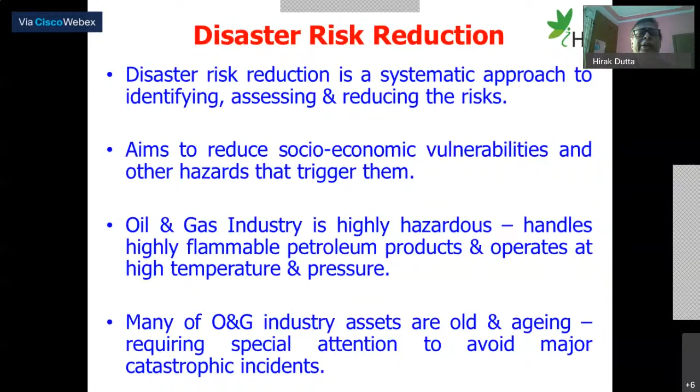But the most preferred options are engineering and technical controls. That's paramount in our industry or any industry - how strong our engineering and technical controls are. If we want to improve operational discipline, if we want to achieve operational excellence, we need engineering and technical controls. As Mr. Surya Prakash has said, and as the Honorable Prime Minister has also talked about, adopting state-of-the-art technology is paramount. Unless we have state-of-the-art technology, we will not be able to ensure smooth, reliable operations.

So then we can also isolate the risk, substitute the risk, or eliminate the risk. Therefore, inherent safe design is very important. Now, when we talk about this, there are three important parameters. The first important parameter is design. We need a very strong design of any installation, be it an oil and gas installation, a steel plant, or a fertilizer factory. Until design of the plant is very robust, we will not achieve excellence.

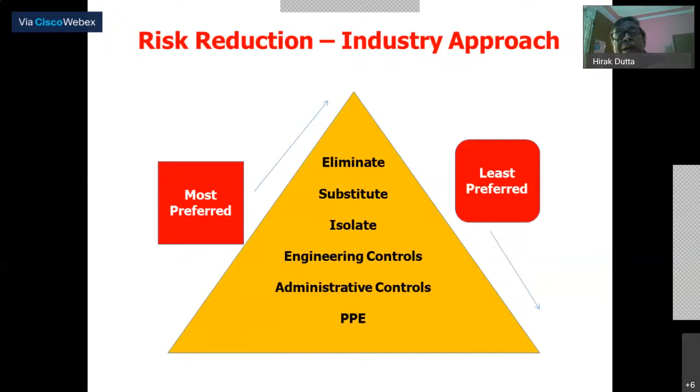So the important thing is how to reduce the risk. I say we must stick to the fundamentals. Keep it simple - it's not a complex thing, but we must stick to the fundamentals. And what are those fundamentals? Design, fabricate, and install all facilities and equipment in accordance with applicable industry codes and recognized best practices.

Now we are coming to when we are procuring various equipment, are we following the standards, that is ASME standards, American Society of Mechanical Engineers standards, or API standard, or Indian-based standards? So therefore, we need to design, fabricate, and install instruments and facilities as per the industry codes and recognized best practices.

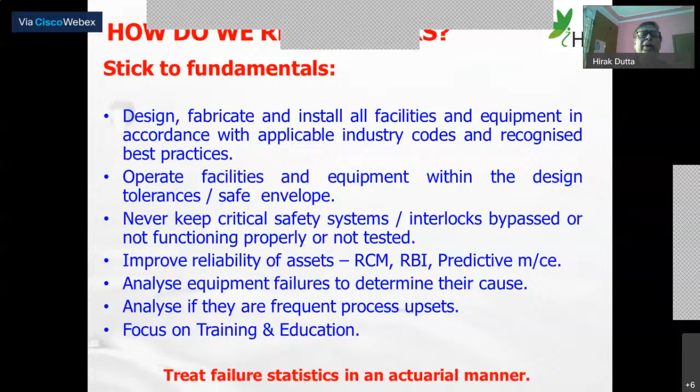Okay, so treat failure statistics in an actuarial manner. That's the point. We have witnessed several major catastrophic incidents in our country as well as outside - Bhopal gas tragedy, Deepwater Horizon, Piper Alpha, Jaipur terminal fire, Tatipaka natural gas explosion, and LG Chem.

Very recently, we have the LG Chem styrene gas leak, in which styrene leaked from the storage tank again, and this is reminiscent of the Bhopal gas tragedy, in which there were multiple fatalities. And many animals lost their lives. And you know, the styrene gas leak - why did it leak?

Because polymerization reaction took place in the styrene storage tank. And why didn't we prevent this polymerization reaction? Because we failed to maintain the temperature. We failed to inject the inhibitor, which reduces the polymerization reaction. So therefore, we need to go into deep root cause, look into the system, and take actions so as to avoid such catastrophic incidents.

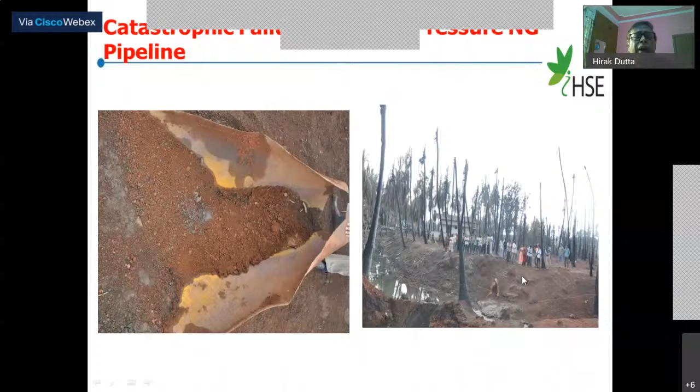Look at the surroundings, all the trees, the palm trees around, they entirely got damaged, and there were multiple fatalities. Let's have a look at the incident.

An incident of fire followed by explosion took place in a pipeline carrying natural gas. This is natural gas - Mahanagar Gas is there, so I'm talking about a natural gas case study. It resulted in multiple fatalities. The fire took place in the early morning.

Background is very important. The source of ignition was a nearby shop. The shop owner lighted the stove for making tea early in the morning, and there was gas present around, and there was an explosion. I will tell you as I go along as to how it happened. It took more than 3 hours for firefighters from many places to extinguish the fire.

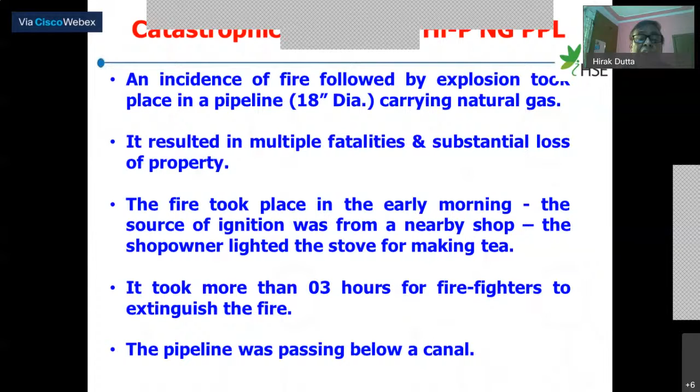The gas pipeline, an 18-inch natural gas pipeline, was passing below a canal. It was observed that there was water and condensate along with the natural gas. Test report of the gas line also indicated presence of CO2. I will talk about it a little later.

The pipeline was operating at a lower capacity. At lower capacity, a pipeline operating means it's operating at a lower velocity. And when it operates at a lower velocity, there are more chances of internal corrosion. Added to it, we have water and CO2, which leads to carbonic acid, a very weak carbonic acid. Therefore, there was internal corrosion noted in the pipeline.

We also noticed - I was part of the investigation team along with my ministry friends - that some damage was also noted in the external coating.

For a pipeline, don't bury and forget it. Pipelines are not for burying and forgetting. Pipelines need to be buried and worried about. It is the safest mode of transportation, the most economic mode of transportation, but we need to manage those things properly. So some damage was also noted in external coating, and this is very important.

There were past incidents of leaks at the 6 o'clock position, many times below the canal. Every time the operator repaired the pipeline by clamping it. Clamping means putting iron around the neck around the leak to prevent leakage, because the operator didn't want to lose throughput. Therefore there were 6 or 7 times leaks at the 6 o'clock position, and every time clamping was done on this high pressure pipeline.

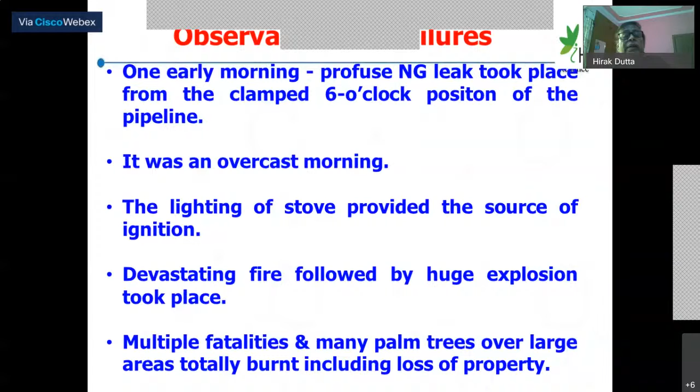Thank God there was a school nearby and it happened early in the morning. If the school was running, if the school had started, the catastrophe would have been on a much larger scale.

So where did we go wrong? The first important thing, as I mentioned, is the maintenance philosophy. A number of times there was a leak in the high pressure pipeline at the 6 o'clock position. And when we inspected the pipeline, it was almost paper thin. So improper maintenance practice was adopted by the operator - clamps in a high pressure pipeline is unheard of.

A 45 kg pipeline, if you resort to clamping instead of replacing the pipeline through proper maintenance and inspection - clamping every time - that has led to the paper thinning of that entire area. As a result, there was a fish mouth opening of the pipeline.

Malfunctioning of the sectionalizing valves. In a cross-country pipeline, to reduce the extent of damage, there are sectionalizing valves to isolate the section of the pipeline from where the gas is leaking, but the remote operated sectionalizing valve did not operate, and the employee or worker had to go manually to close the isolation valves.

They could close the isolation valves, but the remote operated valves did not operate, so someone had to go and manually close the valve. As a result, precious time was lost, a lot of gas escaped, and gas continued to burn.

Operational philosophy: proper pigs were not used for cleaning the pipeline. Instead of using a scraper pig, which should normally be used for cleaning the pipeline since every cross-country pipeline requires cleaning, foam pigs were used, which is not correct. Pigging was not carried out at regular intervals, and pig residue analysis, which is very important and tells us the iron content in the pig residue indicating internal corrosion, was not done. Pig residue was not analyzed.

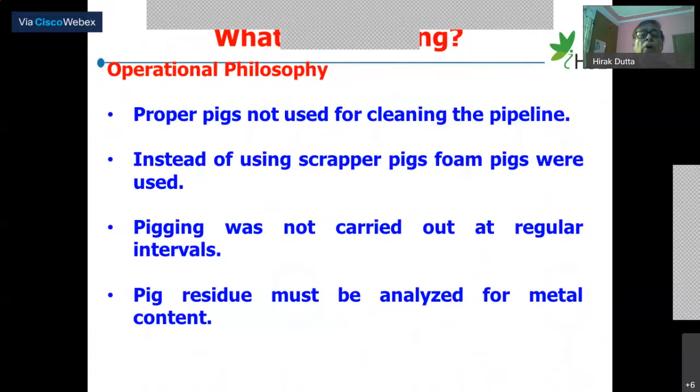Design consideration is paramount. As I said, the pipeline was designed for handling dry natural gas, but instead it handled wet natural gas. Why? The designer provided a dryer in his design, but due to some reason, or to complete the project quickly, the dryer was not installed. As a result, instead of dry gas, wet gas was being handled in the cross-country pipeline, which contained H2O and CO2 forming weak carbonic acid. So corrosion due to carbonic acid, accumulation of water and CO2 at the lowest point, led to the failure of the pipeline.

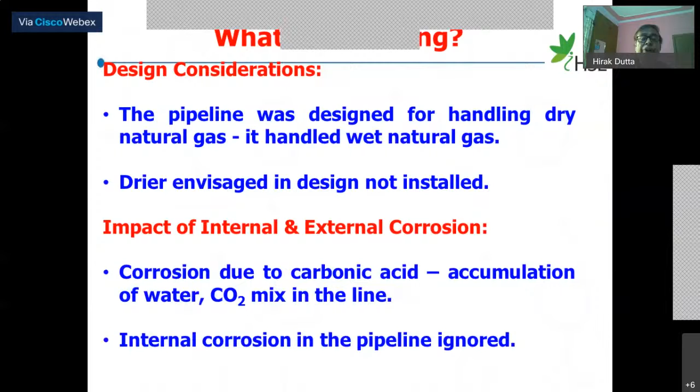Another important thing is the intelligent pigging survey. My friends from Mahanagar Gas Limited are listening. The IPS was conducted 4 years prior to the failure. It indicated metal loss in the vicinity of the canal.

But regarding the IPS report - this is what I tell all my industry friends - we are doing various types of analysis and reports, but we must read the documents. Don't keep aside those important reports. The IPS said there was metal loss, and very importantly, it suggested doses of corrosion inhibitor to mitigate internal corrosion, but this was not done. We did the IPS incurring huge amounts of money, but that report was not utilized. As a result, the catastrophic incident and disaster took place in the area.

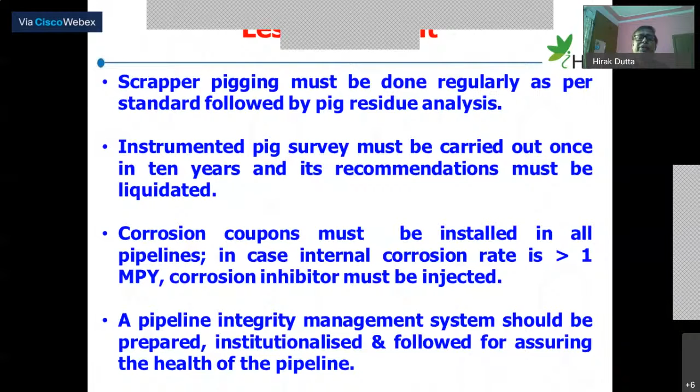So what are the lessons we have learned? This is very important. Scraper pigging must be done at regular intervals. Instrumented pig survey must be carried out once in 10 years. Corrosion coupons must be installed in all pipelines. In case the internal corrosion rate is more than 1 MPY, corrosion inhibitor must be injected. Pipeline integrity management should be prepared, institutionalized, and followed for assuring the health of the pipeline.

Now, a leak detection system should be provided in the pipeline. Today we are going for a lot of contract-related work, which will be reality, so we have to depend on contractors. But over-dependence on third-party agencies should be avoided. We need to supervise and strengthen our own supervision.

I have seen in the oil and gas industry that 84% of accidents take place because of disregard to the standard operating procedure, violation of the work permit system, and poor supervision. In other words, 84% of incidents could be avoided if we improved our supervision, did not violate the work permit system, and paid respect to the standard operating procedures.

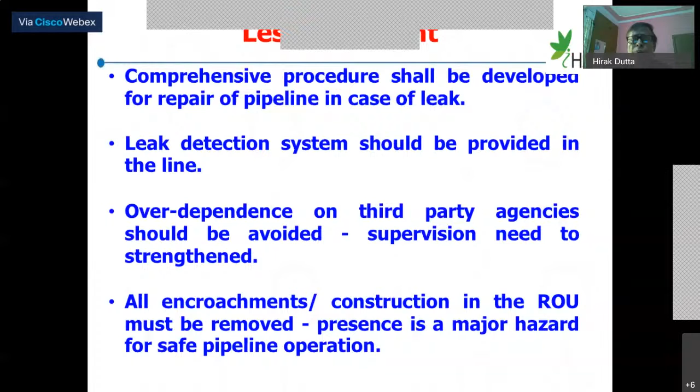All encroachment and construction in the right of use must be removed. Their presence is a major hazard for safety. For that, we need the help of the state administration, as Professor Surya Prakash ji has mentioned. Disaster preparedness and disaster management is not only the job of the operator, but also other stakeholders. These encroachments have come up subsequently - for example, in many refineries and marketing terminals, when they were constructed there was no encroachment around. But today, a lot of jhuggi-jhupris, chaiwalas, etc. have come up along the right of use or outside the boundary wall perimeters, which need to be removed.

So any change with respect to design parameters requires management of change - that is very, very important. Dehydration facility must be provided for removal of water and condensate from all such areas.

Pipelines in service for 25 years must undergo residual life assessment. That's very important, and therefore many pipelines are running greater than 25 years because of this work. The Guwahati-Siliguri pipeline is operating for 60 years.

In USA, there are 4.5 million miles of pipeline, and many are more than 50 years old, operating properly because of proper reliability centric maintenance and proper inspection: feed analysis, IPS, pressure testing, CP monitoring, soil testing. These are some of the important things.

When you supply city gas distribution, soil testing is very important - what is the type of soil? CP monitoring is also very important. These are some of the important things we need to do to ensure there are no catastrophic incidents in our industry.

But aftermath of incidents, what did the operator do? This is a very important thing. What did the operator do to prevent disaster? It happened once, but it should not happen again. So what did the operator do?

They installed corrosion coupons and online moisture analyzers. They removed all clamps and replaced the pipeline sections. All clamps which were there in that area have been removed.

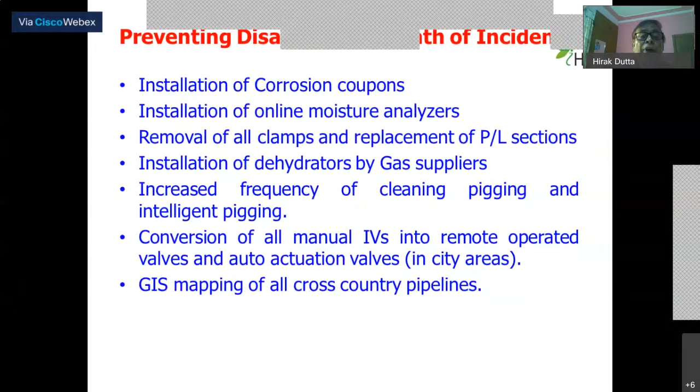Installation of dehydrators by gas suppliers, increased frequency of cleaning pigging and intelligent pigging - this has been done to prevent disaster in the aftermath of the incident. GIS mapping of all cross-country pipelines, and increased frequency of pipeline patrolling.

In India and in many other countries, there have been cases of unauthorized tampering of the pipeline. How do you control it? You can do it by increasing the frequency of pipeline monitoring, and review and validation of all standard operating procedures by international agencies.

The operator took a huge number of steps to prevent disasters, and thankfully, after the Tatipaka incident, no other incident of such magnitude took place in this company or in many of the oil and gas companies. That's a wonderful thing which has happened - a 5-digit toll-free number for reporting emergency is very important in the oil and gas industry.

Highly inflammable - as soon as there is an emergency, as soon as there is a fire, we must try to douse the fire at its nascent stage itself. Therefore the oil and gas industry has mutual aid partners. That's very important, because my own resources may not be good enough to fight the fire, so we have mutual aid resources.

IOC had mutual aid with BPC, HPC; GAIL has with IOC, ONGC, Oil, BPC, HPC. These mutual aid partners, along with the state fire departments, come and quickly mitigate and douse the fire. There's also a scheme for monitoring and quick reporting of pipeline incidents through villagers, and that's a huge step.

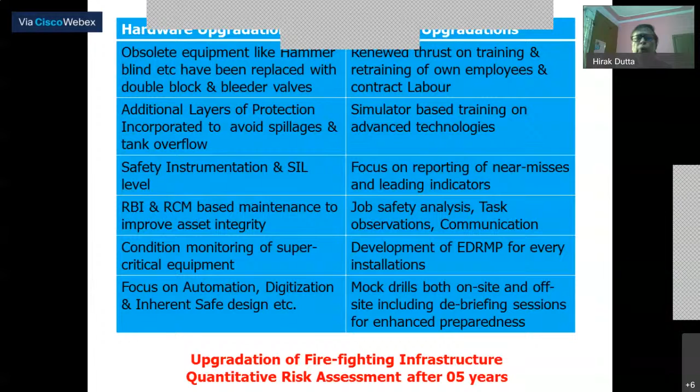That's important. So therefore, for disaster management, they have... due to time constraints, I will complete it in another 5 minutes.

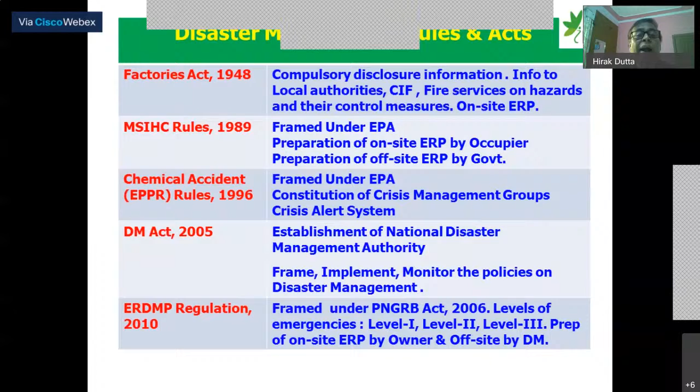So these are all well-known: Factories Act, MSIHC, Chemical, ERDMP. So ERDMP regulation framed under PNGRB Act has level 1, level 2, and level 3. Preparation of on-site ERP is by the owner, and off-site is by DM. So there are 3 levels.

Level 1 is on-site emergency, which can be managed and contained effectively and safely within the site with the available resources. No impact goes outside.

Level 2 is emergency which cannot be managed and contained effectively and safely within the site, and therefore you require the help of mutual aid partners to overcome such problems. So there's potential for off-site emergency. Level 3 type of emergency is one with off-site catastrophic impact.

Now, the styrene gas leak was a catastrophic, level 3 disaster. The case study I shared is a level 3 disaster. So management and control is by district authorities.

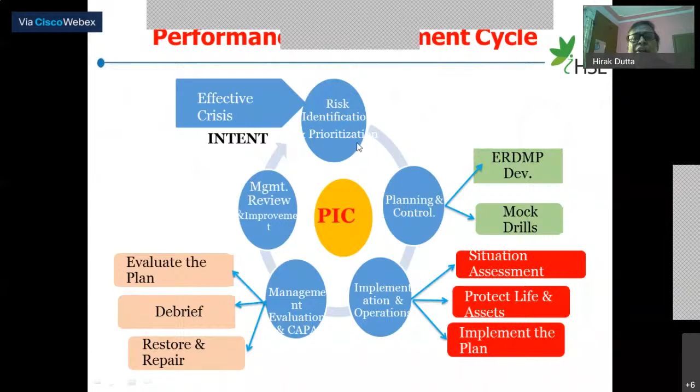Now, I'll quickly go through this well-known performance improvement cycle. We start with risk identification, then planning and control. This is very, very important.

We have ERDMP, we have mock drills, I talked in detail about that. Then we have implementation and operation, situation assessment, protect life and assets, implement the plan. And finally, we have management evaluation.

You need to evaluate the plan. We need to debrief and we need to restore and repair. So the performance improvement cycle starts with risk identification, planning and control, implementation and operation, and management evaluation - evaluating how the plan worked through debriefing sessions and management review.

This is the model for effective crisis management, which must be done at every institute. And finally, barriers to effective management are denial and failure to prioritize. Most of the time we are in denial mode. If you are in denial and failing to prioritize, you'll have problems.

Lack of experience with potential risk, inadequate systems, procedures - if you have inadequate systems or procedures, it's a big problem. And another important thing is unwillingness to share experience.

Most companies today are sharing, but in the good old times, they wouldn't share their success stories. Now, if you don't share your success story - or even failure story, we need to learn from these failure stories - so we need to share experiences so that we can learn from each other.

Failure of leadership and communication. If leadership is not committed - the job of a leader is not only to ask for results, the job of a leader is to provide resources, to enthuse the team, to reward the team, to walk the talk, to become a role model.

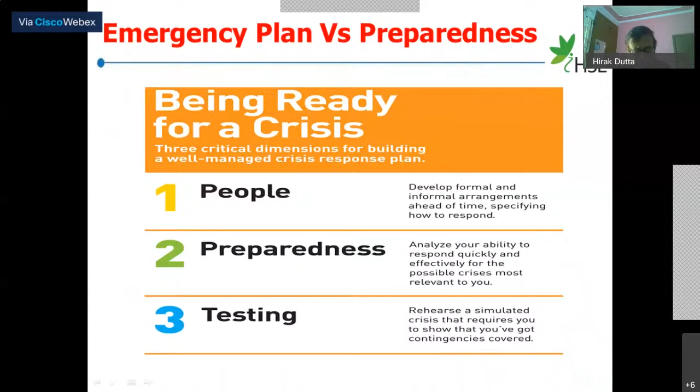That means whatever plan we have made to fight the possible crisis, it must be rehearsed in a simulated crisis, and we see where there are gaps and overcome them. Challenges of emergency: time is the key element, people are the priority, team formation in decision making is paramount. Decision making is paramount - we cannot lose time. Take decisions, and there's the crucial importance of objectivity.

This is the role of ERTL. This is well known, so I'm not going to repeat it.

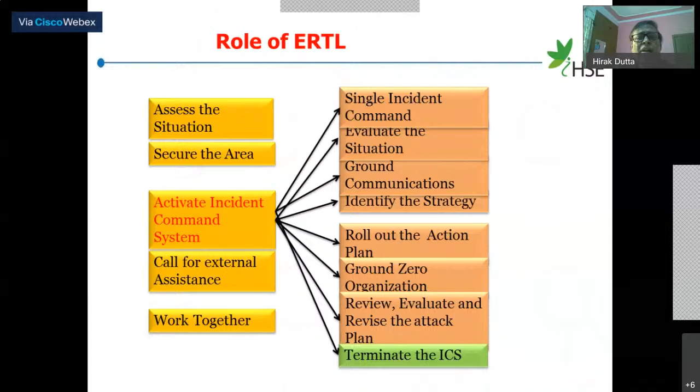Challenges and way forward for the CGD business - these are the last two slides. The CGD business has various challenges. The challenges are broadly classified into setting up of the gas distribution network.

City gas distribution faces two main challenges: setting up the gas distribution network and its operation and maintenance. There are major threats due to third-party damage and diversion of charged lines caused by development activities, since many development activities in the city require us to change or divert the charged line.

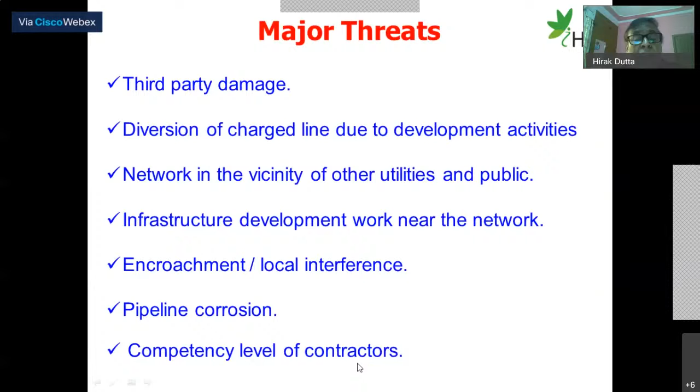The network being in the vicinity of other utilities and the public is a great challenge and threat to the city gas pipeline. Other threats include encroachment, local interference, pipeline corrosion, and the competency level of contractors, which we need to improve since they are doing this job for us.

With respect to operational security for CGD, we need to deploy emergency teams at strategic locations, because if something happens like a gas leak or gas fire, we need to respond quickly. An emergency control room and 24/7 network patrolling must be done - this is a challenge.

Regular preventive maintenance of equipment like booster compressors needs to be done properly. As I've mentioned, safety mock drills are important - I've discussed this in detail already. Display of do's and don'ts must be done, and continuously conducting safety audits is very important.

On the last slide, to enhance effectiveness we need continuous monitoring - things which are monitored get implemented. So to mitigate disaster, we need to continuously monitor and enhance reliability. We need to adapt state-of-the-art technology - not just adopt or incorporate it, but truly assimilate it.

Close coordination with all stakeholders is essential. We are working with various stakeholders, and since we go for mutual aid partnerships, we need good coordination with state law and order, state fire machineries, the fire department, and also with villagers, etc.

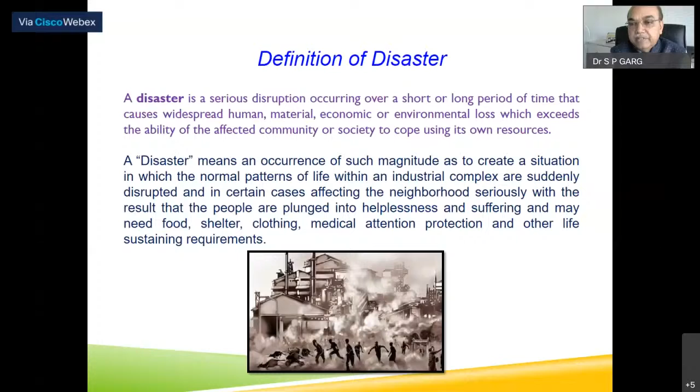In terms of definition with respect to industry, since we are talking about man-made disasters today - a disaster means an occurrence of such magnitude as to create a situation in which the normal patterns of life within an industrial complex get totally disrupted, and in certain cases affects the neighborhood also seriously, resulting into helplessness, sufferings, and need of food, shelter, clothing, medical attention, and other life-sustaining requirements. This is a broad definition, as we all understand.

Now, what are the underlying factors why disasters are happening or likely to happen? Rapid urbanization - we all know what happened around the Jaipur petroleum depot. The population was not there earlier, but slowly they all came very close to the installation. As a result there were losses, there were damages.

High population growth, poverty - that is another reason. Because of poverty, people are even encroaching on pipeline right of ways. As was mentioned, even in restricted areas huts are being made, or people are just staying there without bothering even for their lives. Rapid industrialization all over, and lack of awareness.

As was mentioned, societal awareness - of late there is a lot of effort in this direction. Capacity building is happening, societal awareness is increasing. NDMA, NIDM and others are doing a lot of mock drills for the public to understand what are the risks, what are the hazards, how to handle disasters, and environmental degradation. These are the underlying factors for disasters.

If you look at some figures - in the period 1998 to 2017, disaster hit countries reported direct economic losses of more than 2,908 billion US dollars, of which climate-related disasters accounted for 2,245 billion dollars. So this is a huge figure.

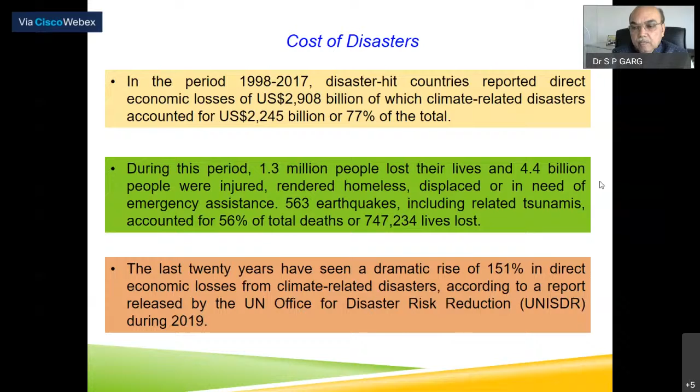Now, Sendai framework, if we talk about it, Mr. Suryaprakash already mentioned that it's a 15-year voluntary non-binding agreement that recognizes that the state has primary role to reduce the disaster risk, but that responsibility should be shared with other stakeholders like local government, private sector, and others. So these other stakeholders, the industry also falls under this category.

So we also have the responsibility to prevent the disaster risk, reduce the disaster risk. The aims for the Sendai framework were for substantial reduction of disaster risk and losses in lives, livelihoods, and health, and in the economic, physical, social, cultural, and environmental assets of people, businesses, communities, and countries.

What were the major thrust areas, the 7 targets given by Sendai framework? There were 4 areas where substantial reduction was targeted: substantially reduce global disaster mortality, substantially reduce number of affected people globally, reduce the direct economic losses in relation to global GDP, and substantially reduce disaster damage to critical infrastructure and disruption of basic services. These were the 4 areas mentioned for substantial reduction.

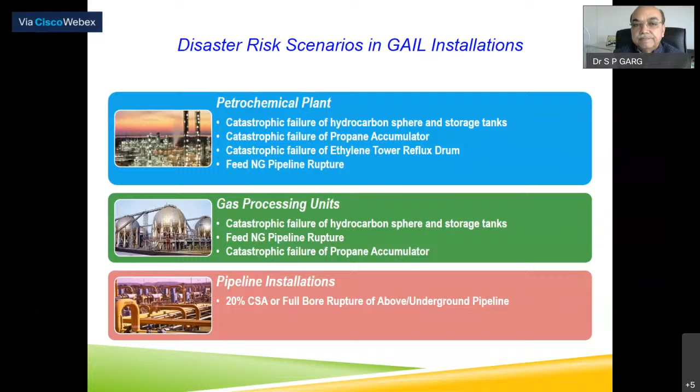In case of pipelines, there are various threats and risks. Some are time dependent, for example because of external corrosion, internal corrosion, and stress corrosion cracking. Some are stable risks, for example manufacturing related defects in the pipelines, welding and fabrication related risk, equipment related risk. And there is time independent risk, like third party mechanical damage which could happen during handling of the pipelines or even after, because of third party intervention. Incorrect operational procedure—not following the SOP—also leads to serious accidents and could lead to a disaster. Then there are weather related and other related risks, different kinds of risks and regions which could lead to disasters.

As we all know, hydrocarbons are highly flammable substances and they are transported through cross-country pipelines at very high pressure, and often they are very close to high population areas, so they cause risk to the environment and the population in that area. So there are various ways to handle these risks safely.

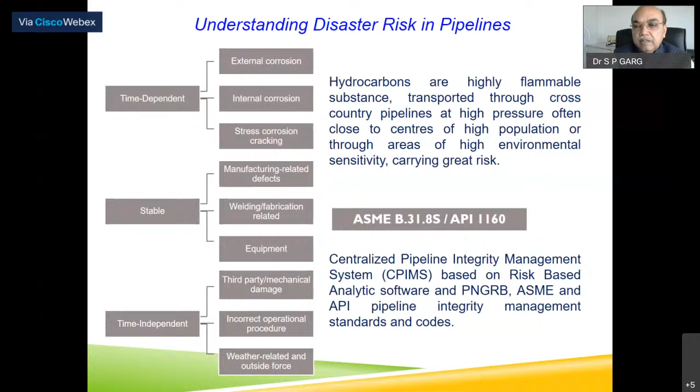I will talk about those later. Then, challenges in CGD pipelines—we have since a lot of people from Mahanagar. The pipelines in the old cities face space constraints, busy roads, inadequate infrastructure, and multiple utilities. There have been so many cases of CGD gas lines being punctured by third parties, in spite of having rules and timelines set by the state or district administration that before any third party does a civil job, they must take clearance from the pipeline operator. Many times it doesn't happen. There's no availability of integrated clearance for pipeline laying, lesser control on access, heavy urbanization, less public awareness and presence of NGOs, and dependency on outsourced manpower.

Almost 80% or more of the manpower is outsourced. So there is a lot of dependency on those people who are actually not, sometimes not literate, and sometimes not skilled enough to handle these specialized jobs.

Then third-party excavation, as I already mentioned. And if any incident happens, or even sometimes there is something near the pipeline, any media house will pick it up and put it on national television and other media that there is a leakage, without even verifying that actual leakage is there or not. So this kind of risk is there today in the hydrocarbon pipelines.

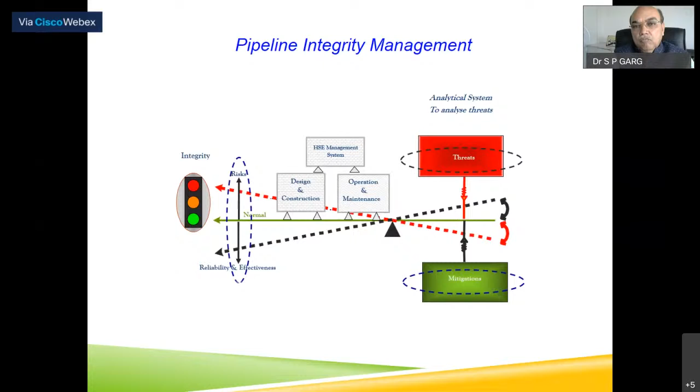If we look at some of the integrity management tools, the speaker also mentioned some of those, like we have the inline inspection tools for knowing the health of the pipeline from inside. These are very intelligent tools also, which can tell you immediately what defects are developing in the pipeline from inside. Then for outside, you have the coating.

Different kinds of coating are there, and cathodic protection is also there. The regular surveillance, intelligent pigging, then direct assessment, evaluations, thickness assessment, and periodic reviews -- these are the tools and procedures to actually maintain the integrity of the pipelines.

During design and construction, mainline sectionalizing valves are provided so that in case of any failure of the pipeline or third-party intervention, you can isolate a section of the pipeline and limit the risk to that area only. These valves are generally remote-operated valves, and in fact now in populated areas, for example city areas, even auto-actuated valves have been provided, which will operate automatically with the change in pipeline pressure.

Then all pipelines have the pigging facility for internal cleaning, for 4-inch and above pipelines, and 10 kilometers and above, and you have this kind of provision -- automatic, as I was mentioning -- adequate safety instrumented systems and emergency shutdown facilities for stations.

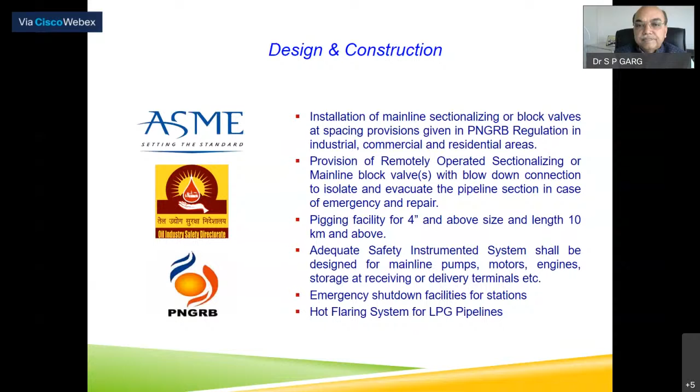When you lay a pipeline, you have to acquire a certain area, a strip of land, maybe 20 meters wide, 30 meters wide, depending on the pipeline size. That is called right of way, ROW or ROU, whatever you call it. In that area only the pipeline is buried, generally at 1 meter depth or below, and no permanent construction can be made in this ROW area.

Now these are inspected regularly. The road and highway crossings are inspected once in 3 months, river crossings twice a year, and ground patrolling, aerial patrolling -- this kind of patrolling is done, so that in case of any encroachment or anybody damaging the pipeline, it can be immediately identified.

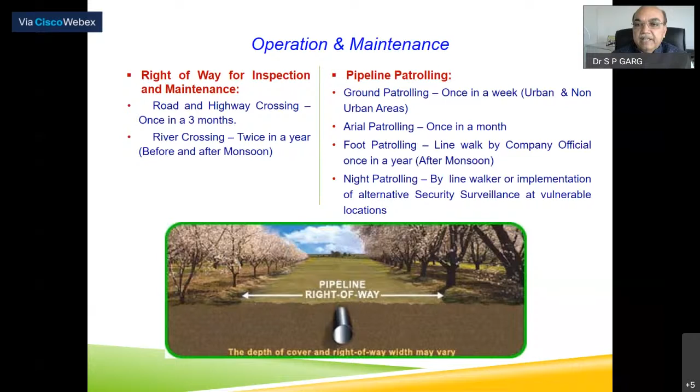Pigging, I have already mentioned, there are 2 types: normal pigging, which is done once a year, also called cleaning pigging, and intelligent pigging, which is done once in 10 years.

Now, if you can look at this small video, this will give a flavor of how the pipeline pigging is done, how the defects are identified through the intelligent pig.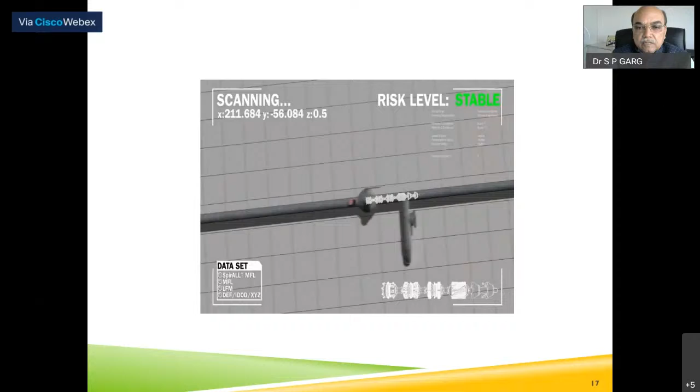This is the inline tool, which is loaded into the pipeline, and then it moves along with the gas flow. As soon as there is a defect, it will immediately identify and give you information. Yeah, there is some general corrosion found, immediately rejected.

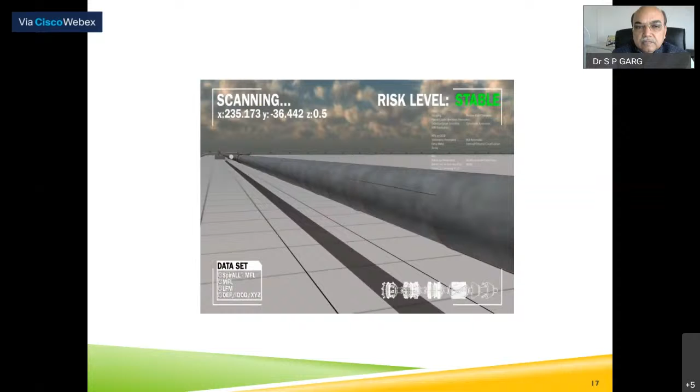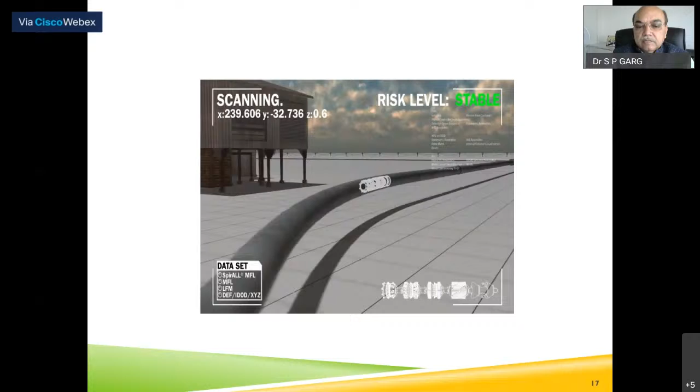Some deformation found in the pipeline has also been detected. It moves like that. I will not show the full pipeline video.

For cathodic protection, pipe to soil potential is measured at the feeding point. This is done once in a fortnight, and PSP reading at test lead points is taken once in 3 months. This is necessary to maintain sufficient potential in the system. Coating survey is done so that the coating is always intact.

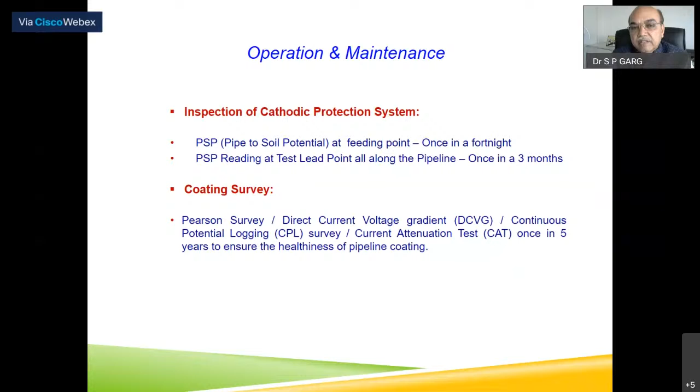In this movie, we're looking at technology at work in pipelines: cathodic protection so the pipeline doesn't rust, how leaks and hazards are detected, critical inspections inside the pipeline, and the marvel of directional drilling.

So let's begin. What if a machine were to damage a pipeline's protective coating? Bared steel would naturally turn to rust. Pipelines have protection against rust.

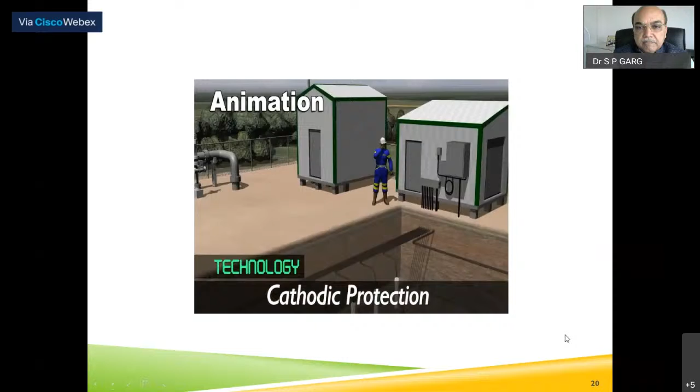Along the pipeline, they install what are called anodes and supply small amounts of electric current. The current flows through natural ground moisture to the pipeline and redirects where the corrosion will occur. Pipelines have been doing this for decades now. The current encourages the anodes to corrode. The pipeline becomes a cathode and is protected from rusting in case any steel has somehow become exposed.

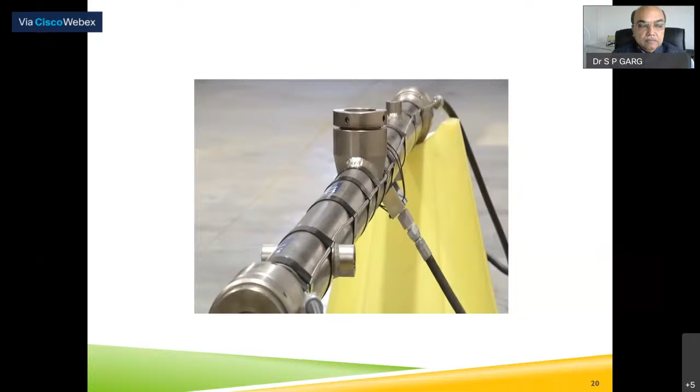Pipelines have leak and hazard detection. In this new system, a continuous stream of data is collected and transmitted by next generation fiber optics. The fiber optic is both transmitting data and, more importantly, acting as sensors on a fully distributed basis along the pipeline, measuring acoustic, strain, and temperature, accurate to within 1/100th of 1 degree.

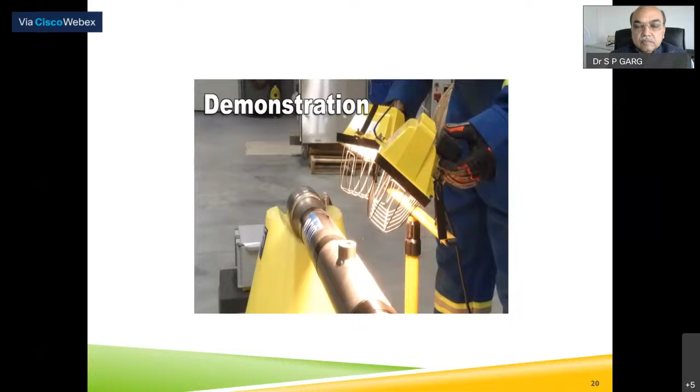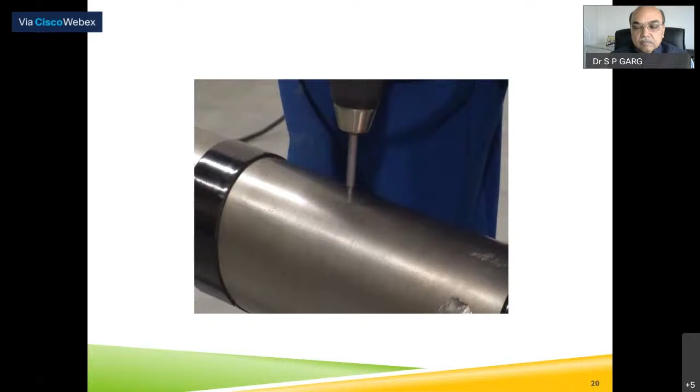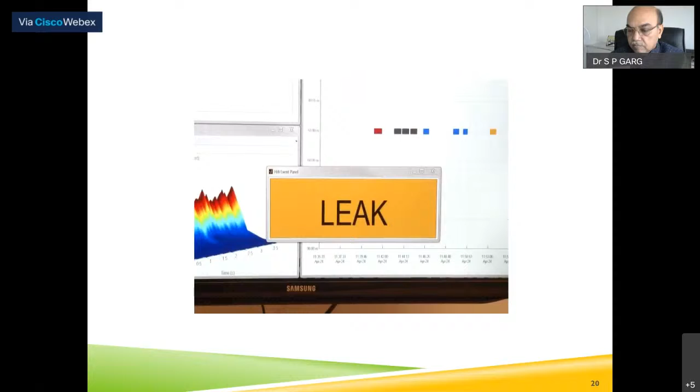Pipelines track detailed data about each length of pipe. But now technology allows them to track more easily and reliably, and track a lot more information.

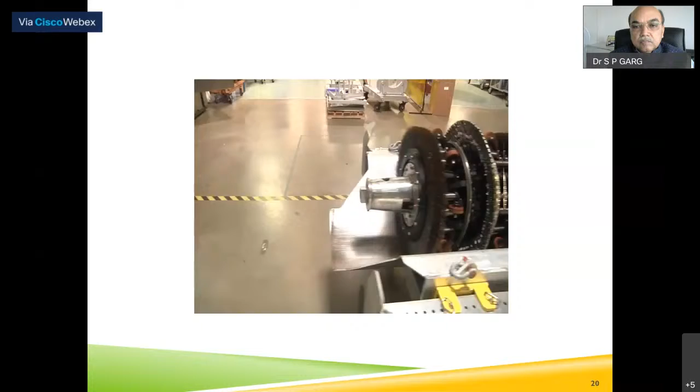Pipelines depend on inline tools commonly called pigs. Most times they're fitted with brushes. But there are also devices for early detection of problems, bristling with technologies to identify wear or cracks usually too small to see.

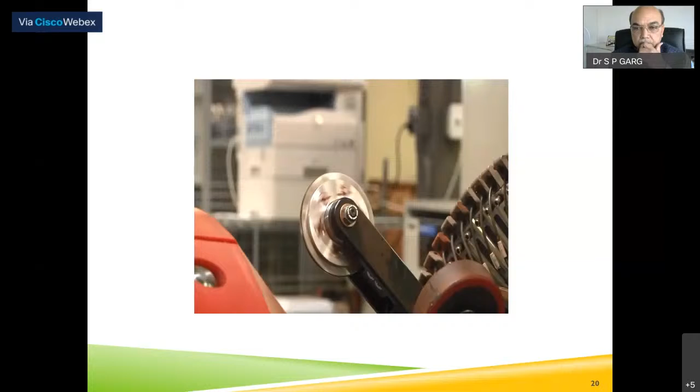Powerful magnets, hard drives, and GPS tracking. The odometer measures to within millimeters for anomalies. This module sends sound waves along the pipe circumference. Multi-million-dollar tools detect trouble in pipelines. Data from a smart pig brings us to look at horizontal drilling.

So I'll now skip this because time is short. So you have seen how the pig actually looks like and how it works inside the pipeline.

Now moving forward, what are the disaster risk reduction legal frameworks in India? There are rules and regulations in the Factories Act, MSIHC rules, CA rules, Disaster Management Act, ERDMP 2010, Disaster Management Plan of MPNG, etc. These are the legal requirements with respect to disaster management in the oil and gas sector.

Now these are further details. I will not go through it because of the shortage of time.

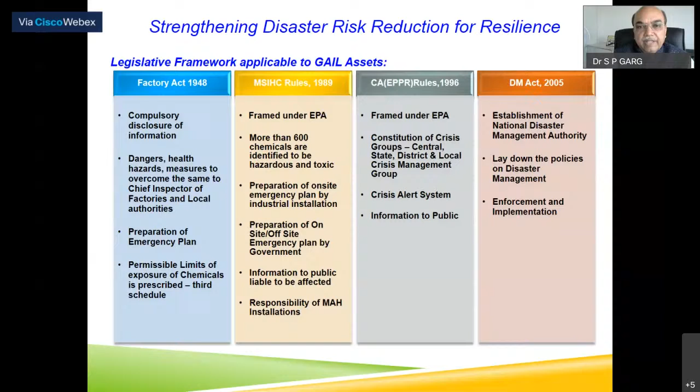Let's move forward. Especially in CGD safety: PNGRB standard T4S is the technical and safety standard for CGD natural gas pipeline, and OISD standard 226 talks about natural gas transmission pipeline and city gas distribution network, and ASME 31.8 covers gas transmission and distribution piping systems.

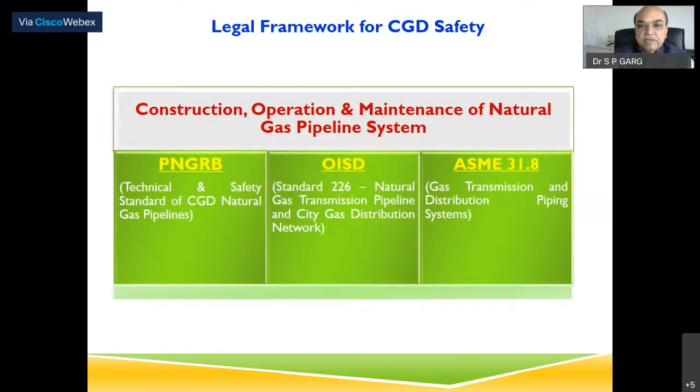Coming back to give you a typical example of how oil and gas works: each oil and gas company has an HSE policy, which has the intent of the top management, showing how they are going to handle HSE management within the company.

So these are some of the highlights: design, construct, operate, and maintain facilities as per national and international standards, comply with statutory rules and go beyond, optimize HSE resources, implement occupational hygiene measures, make use of effective waste management systems, etc.

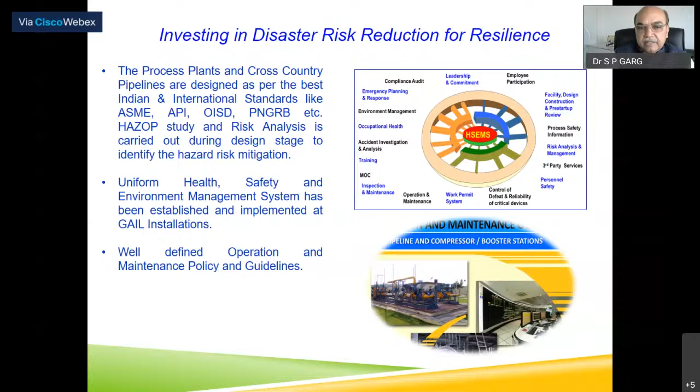Now, below that HSE policy, there is an HSE management system. The process plants and cross-country pipelines are designed as per the best Indian and international standards, as I mentioned, ASME, API, OISD standards, and then you have this kind of HSE management system.

The proper layout and inter-system distances with the facilities is maintained as per the various OISD standards and PNGRB regulations, to be specific 118, 226, and 214 OISD standards. Then you have PLC and DCS based control system to ensure adequate control. Automatic emergency shutdown interlocks are provided. Leak detection system. Then supervisory control and data acquisition, that is SCADA.

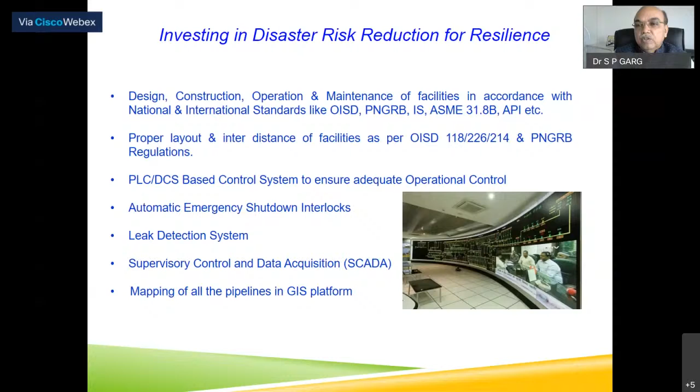Mapping of pipelines in the GIS platform. This is very important that all the pipelines have been mapped on a GIS platform, through which, in case of any incident at one particular point, you can immediately know what are the emergency resources available nearby, what are the hospitals, who are the Gram Pradhans, what is the police station, what district administration is in that area. That will be known immediately through this GIS mapping.

Then these are standard measures which are provided in the plants and other facilities. Electrical equipment as per the electrical area classification, and remote operation valves in the main pipeline. Fire water system to fight two major fires anywhere in the facility. Early warning system like gas monitoring system, detectors, high level alarms, low pressure and high pressure alarms, etc.

Then dike walls all around the storage tanks. Then installation of PSVs and TSVs to avoid overpressurization. Automatic fire detection system for critical equipment. Safe interlock bypass authorization system, so that nobody bypasses the interlocks without due authorization.

Well-laid SOPs, as it is being told that not following SOPs is a major reason for incidents and accidents. In GAIL, we took initiative to even make animated films on SOPs, so that the operator is crystal clear what are the steps to be taken in a particular activity, and he can see and revise it again and again by seeing those animated films.

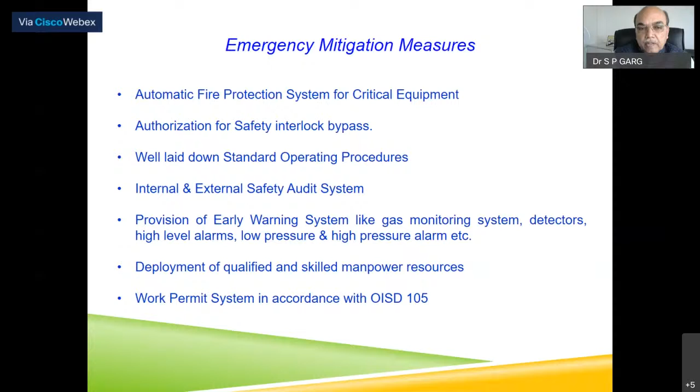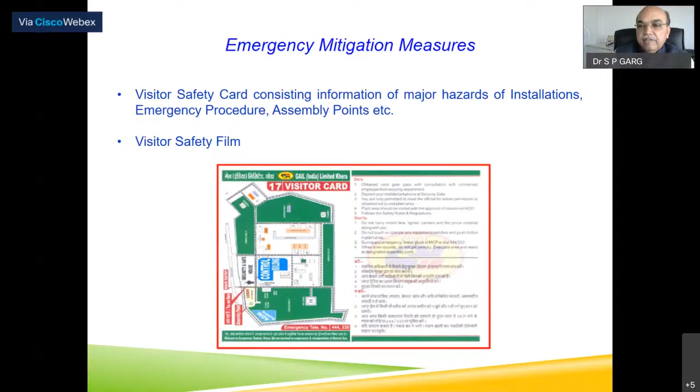These are other major use of walkie-talkies and visitor safety and all those measures. I will not go through everything. Visitor safety card is given, then visitor safety film is given, is shown at the main gate before any visitor enters the plant.

Response preparedness, then mock drills are done, then you have emergency communication system, mutual aid agreement, you have practices regularly being done with the mock drills and the mutual aid partner, along with the mutual aid partner also. And the emergency information is available on the disaster management plan.

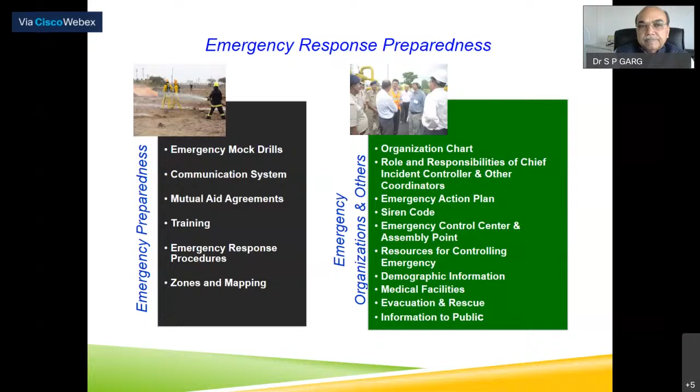Public campaign through radio jingle or even nukkad nataks are being regularly done for the villagers. They are being sensitized on what can go wrong and what is their role. We also have a GAIL Sahyogi scheme through which some of the villagers through whose land the pipelines are passing are engaged with GAIL, with some amount of incentive given to them so that they become the eyes and ears, and in case of any leakage or any third party intrusion, they can immediately inform us.

Then live firefighting training ground facilities, these are also developed so that people are ready to handle any emergency, any incident, and avoid them converting to disasters.

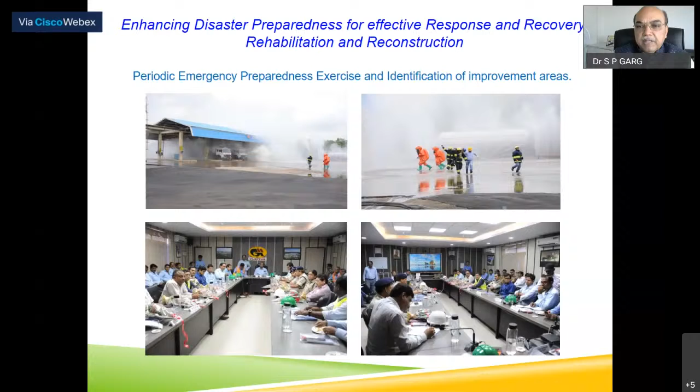Various mock drills happen not only within the plant or facility, they're also happening with the district disaster administration and involve all these stakeholders. NDMA is also called so that they can give their valuable inputs if there are any drawbacks. And post mock drill, the review happens along with the in-charge of the site.

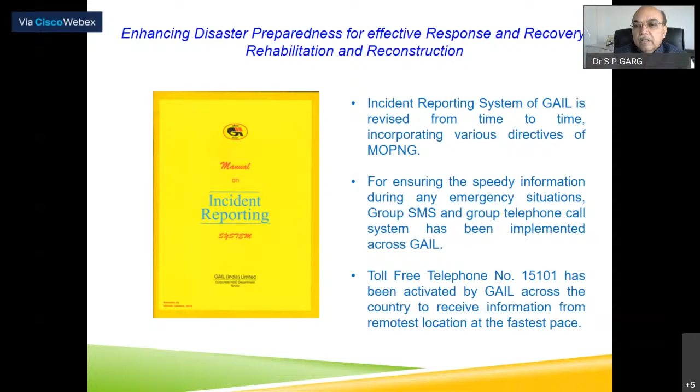This is regularly happening. We have a very detailed incident reporting system for quick reporting of incidents and whose role is what is very clearly given. And the 5-digit telephone number all over the country, 15101, can be called for any information in an emergency.

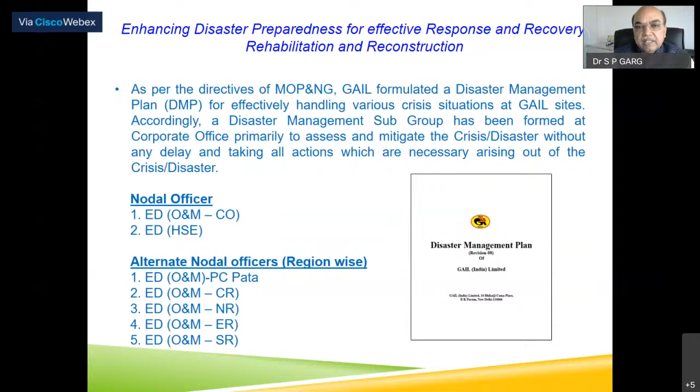This is a disaster management plan which has nodal officers and other alternate nodal officers. This is an important area. All over India, we have a National Gas Management Center and Regional Gas Management Centers spread all over the country. This is to monitor the movement of gas through the pipelines, and in case of any emergency, they become emergency control centers also. Instant leak detection happens with the help of remote terminal units, and real-time data of all the pipeline parameters, supply, delivery conditions, and all the resources and major customer terminals is maintained through SCADA.

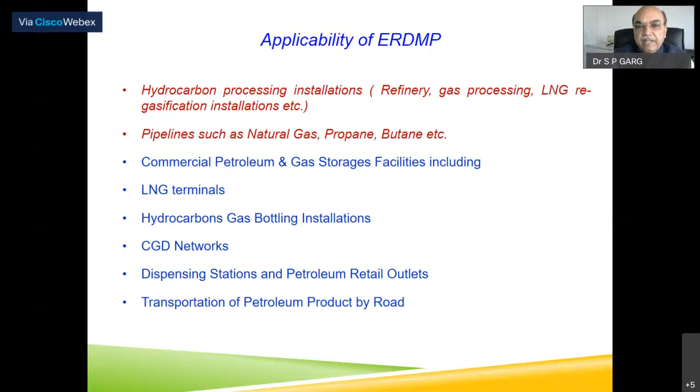Now, ERDMP is already applicable for upstream, downstream, midstream installations. This has been written down in detail in the PNGRB regulation. The scope is identification, mitigation measures, preparedness, response measures, then post-disaster recovery. I will not go into the detail.

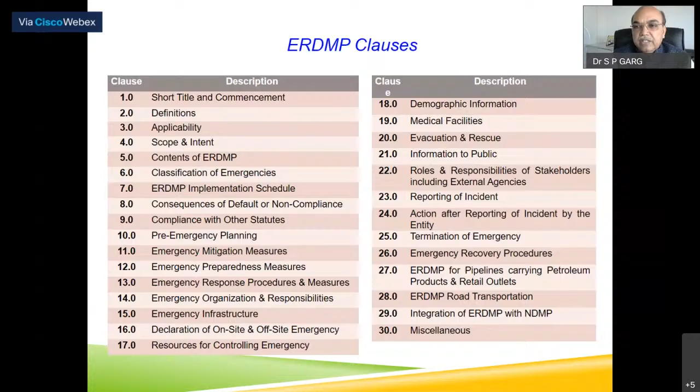These are various clauses in the ERDMP. Recently ERDMP has been revised, the regulation. Initially it was released in 2010, and in 2019 we took up the revision. I happened to be part of the revision committee, chairing the industry committee, and this has been notified again.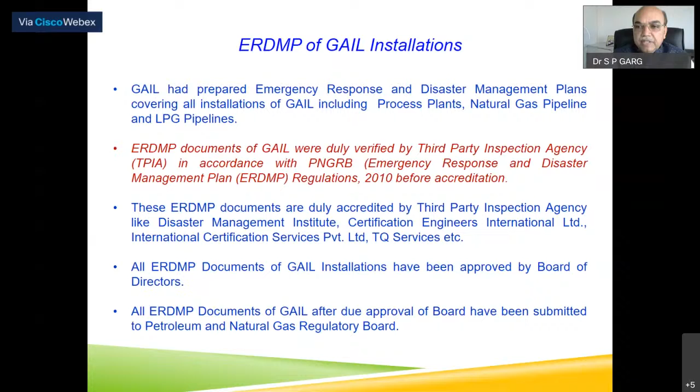Pre-emergency planning: industrial hazards, you have to identify natural hazards, whether your industry falls in that area, cyclone prone, earthquake prone, etc. And what could be the extraneous hazards, bomb threat, civil disorder, terrorism. These are to be identified right from the beginning.

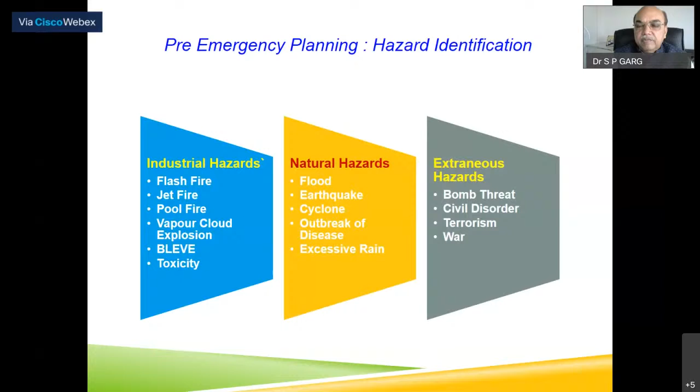Now, when we talk about disaster management, we also talk about HSE management system, which is a fundamental tool through which the entire system is managed. In GAIL, this is an 18-element HSE management system, starting from leadership and commitment, employee participation, facility design, construction, pre-startup review. These are various 18 elements which have been further detailed out so that SOPs can be written by sites with respect to each element.

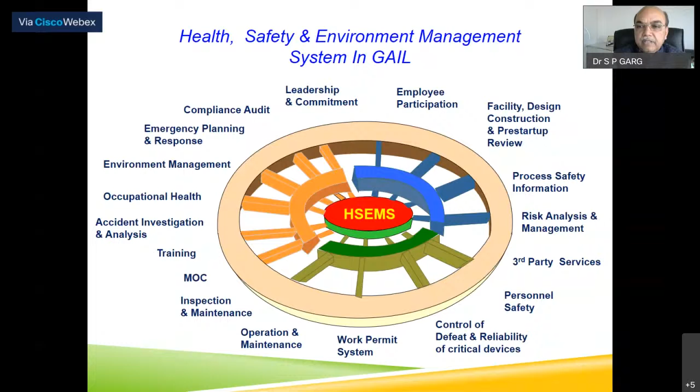Process safety information, risk analysis, management, third-party services, personnel safety, control of defeat and reliability of critical devices. As I was mentioning, it's very important that interlocks are not bypassed unauthorizedly. Many incidents in the past have happened all over the world because of bypassing of interlocks.

Then emergency response preparedness, you have mutual agreements and you rehearse it frequently.

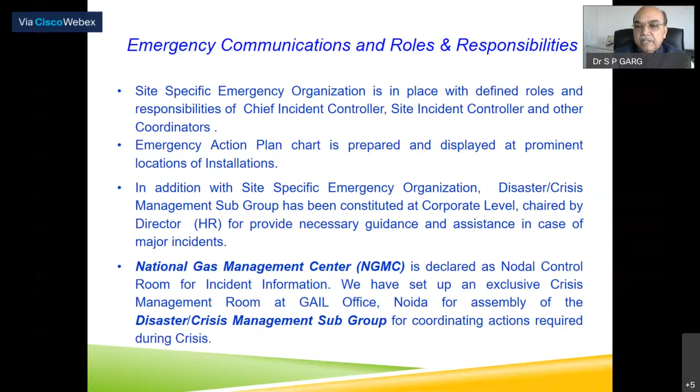I will not go again into the details of emergency communication. I was already mentioning about the NGMC and RGMC. We also have a system of multiple SMS and voice telephony. In case of emergency, the people to be informed are already listed out. With one click of a button, everybody gets the SMS and everybody gets the voice telephone message, through which instant transmission of emergency information happens, and the designated person takes the required action.

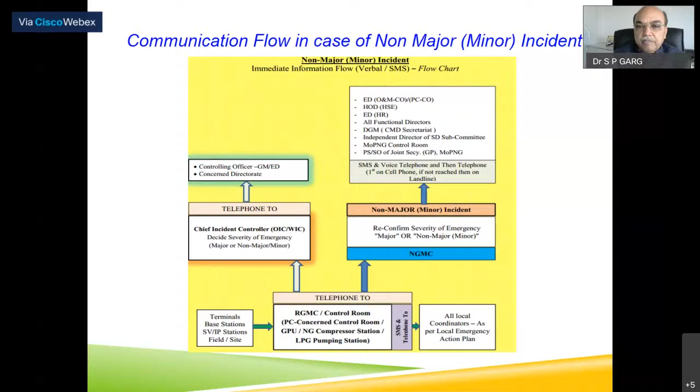This is the communication flow in case of a non-major incident. As per the MOPNG, incidents have to be classified as major or non-major. So what will be the flow of information? As soon as the information is received at the RGMC, Regional Gas Management Center, how it will travel and who are the people to be informed. This is all written down and thoroughly conveyed to all concerned people.

Emergency recovery procedure.

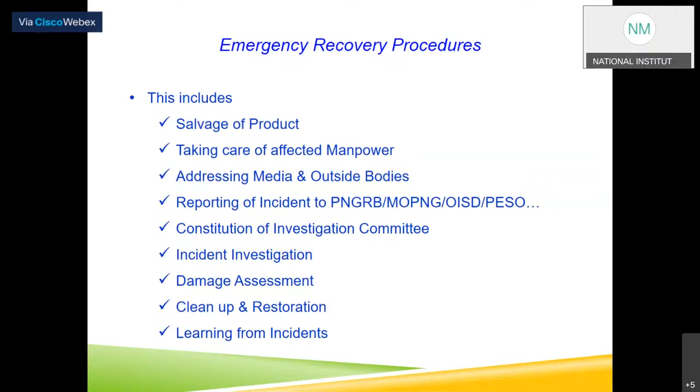Yes, sir, sorry for the interference. That's just a gentle reminder for the time constraints. Yes, yes, I know, within 2-3 minutes I'll come. Thank you, sir.

Review and implementation of ERDMP, I have already mentioned. Now, to give the highest attention, as was mentioned by Mr. Datta, leadership role is very, very important. So there is a board level subcommittee who are reviewing constantly what is your progress with respect to safety management and disaster management. This is very important for the oil and gas industry, and it is happening in the oil and gas industry.

So we should have a robust safety governance mechanism wherein the role of CEO or COO, officer in charges, HODs in safety management has to be clearly spelled out, and they must review safety in every review meeting.

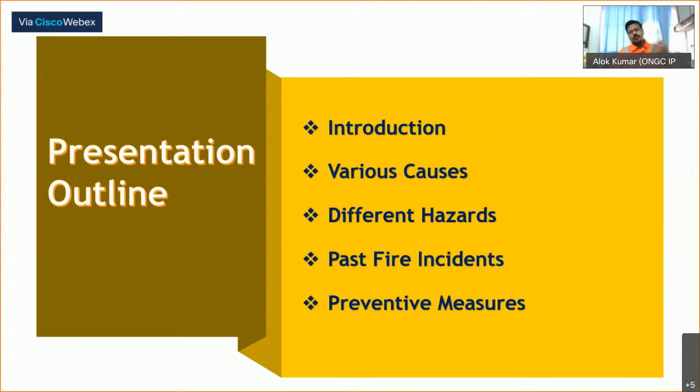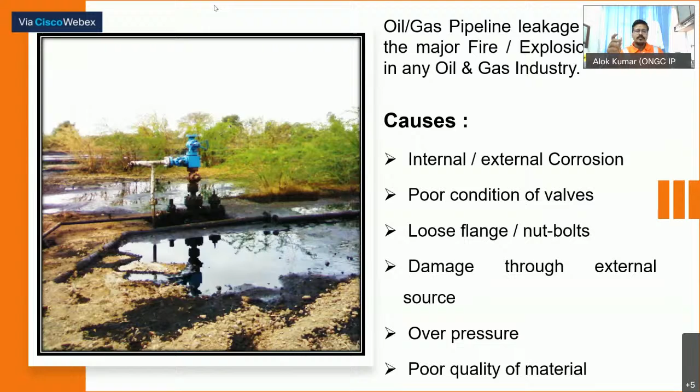So these are some of the major causes which can lead to oil and gas leakage. Moving on next - what can be the consequences of such leakages? Leakage of any oil and gas can convert into fire.

The next one is explosion, or unconfined vapor cloud explosion, that is UVCE. Can you tell me what you understand by UVCE, or have you ever come across this terminology UVCE? What is this terminology? You can mention it in the chat.

This word UVCE, this abbreviation - so this is unconfined vapor cloud explosion.

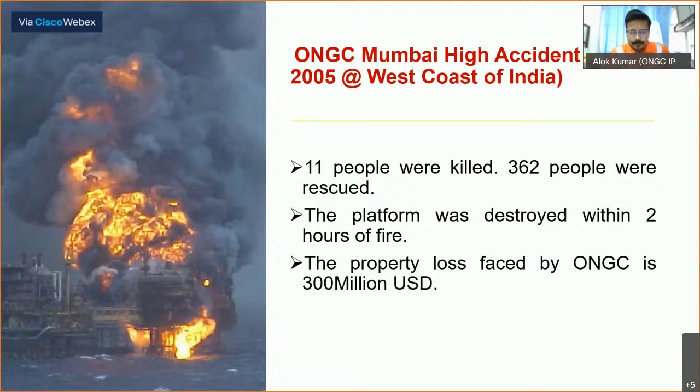The next one, I'd rather call it a leakage, it's basically a spillage - the Deepwater Horizon spill, also known as the BP oil spill. It happened in the year 2010, 20th of April. It is also known as the largest marine oil spill.

It was a long month-long marine oil spill where 4.9 million barrels of crude oil were spilled into the Gulf of Mexico. During the incident, 11 people died and more than 17 were injured, and $18.7 billion were imposed as a fine by the US government onto BP, British Petroleum.

Moving on, I would like to ponder upon a few important points. Never ever try to neglect any leakage, whether small or big - any incident starts small, and as time passes it gradually takes a bigger form. And it's always better to handle or care for any incident in its incipient or early stage. So always try to be alert and report immediately wherever you find any kind of leakage.

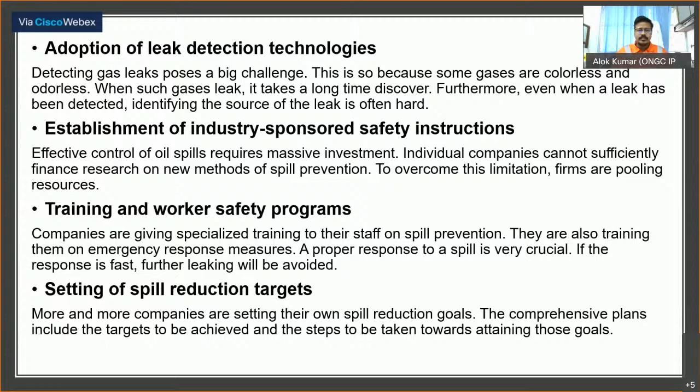ईयरली बेसिस पे। सो दीज आर सम preventive measures, and moving on next, probably I think this is the last slide.